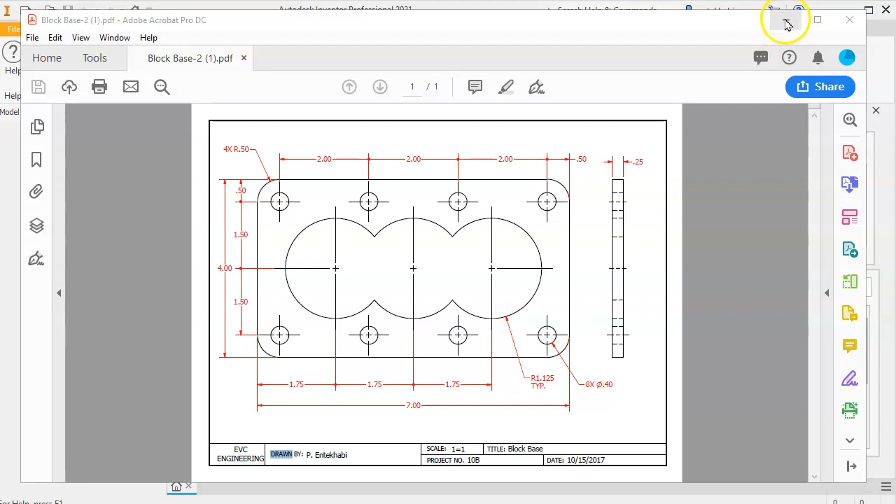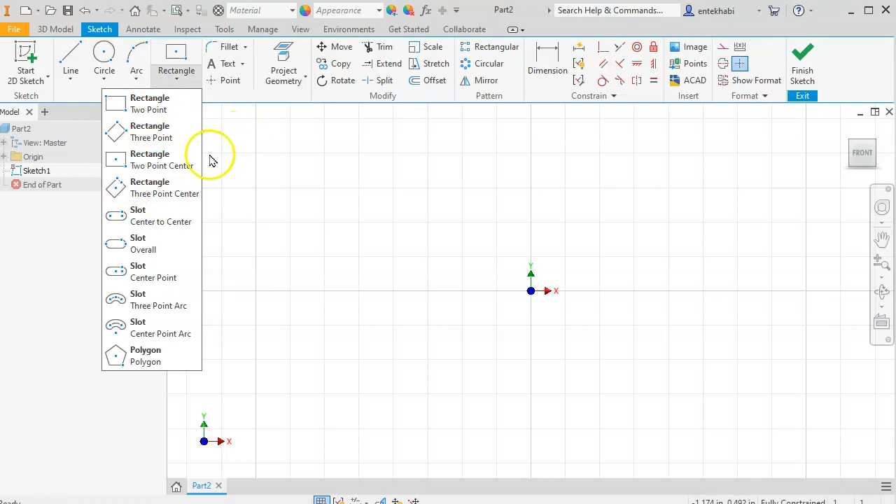Let's begin the model with accessing Inventor with a new file. We can start this new part with the default settings on English standard, and then start your sketch on XY plane. We can select this rectangle option. 2-point center would be feasible in this case. We can select the origin as a center and define a point on the upper right corner, and then add dimensions as indicated, 7 units, in this case 7 inches by 4.

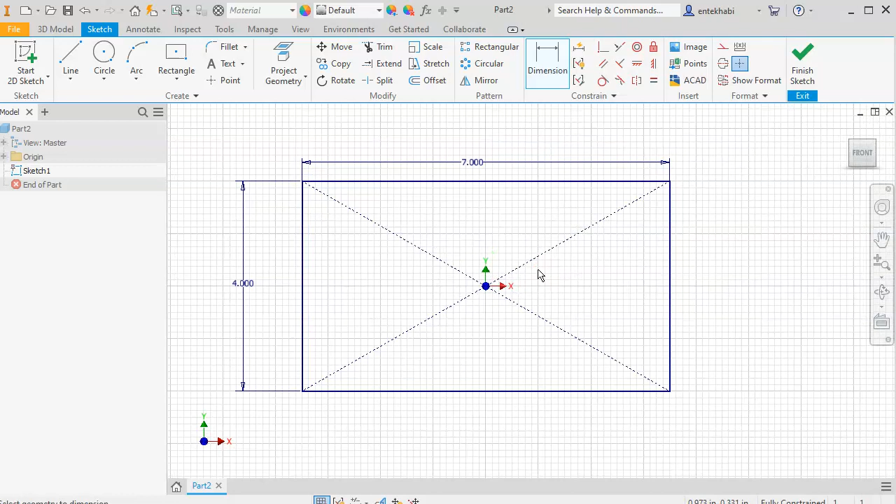At this point, you can add the fillets if you like, or you can add the fillets in the model. It's not too complicated to add the fillets here. We can do that by adding the fillets, setting 0.5 as radius, and selecting the corners, each line, to add the fillets to the corners. So arcs between two lines can easily be created with the fillets.

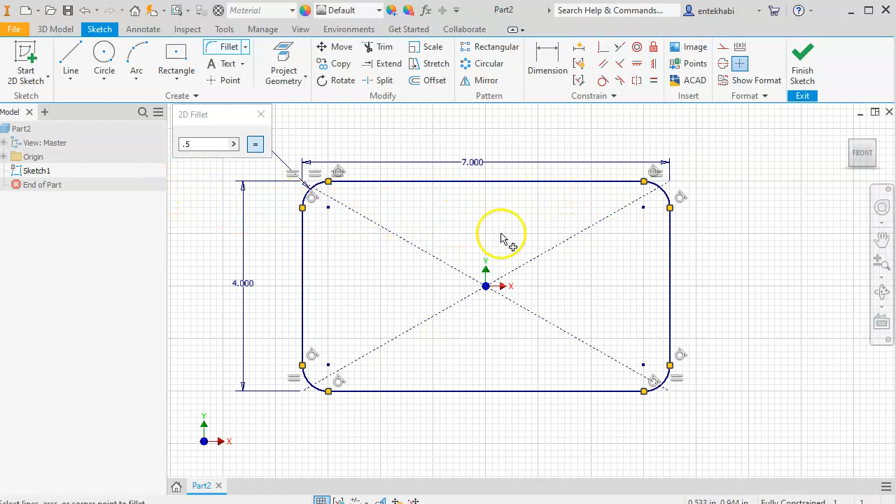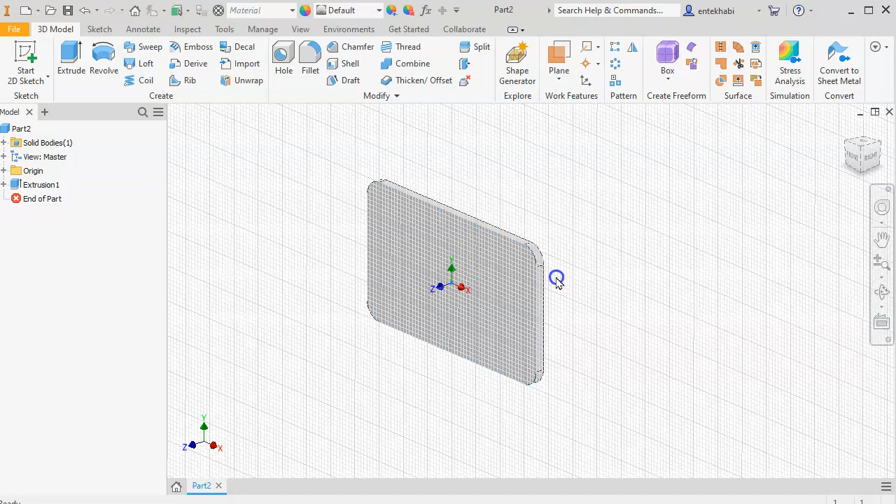Now we have that sketch. I'm going to just finish the sketch at this point and extrude 1/4 inch. 1/4 inch is the thickness in this case, the height of the extrude. Select the front face as a work plane and then start a new sketch. I'm going to do the middle part first by drawing 3 circles starting from the origin, selecting the next to the right, another circle, 1 to the left, 1 more. We have 3 circles in this fashion.

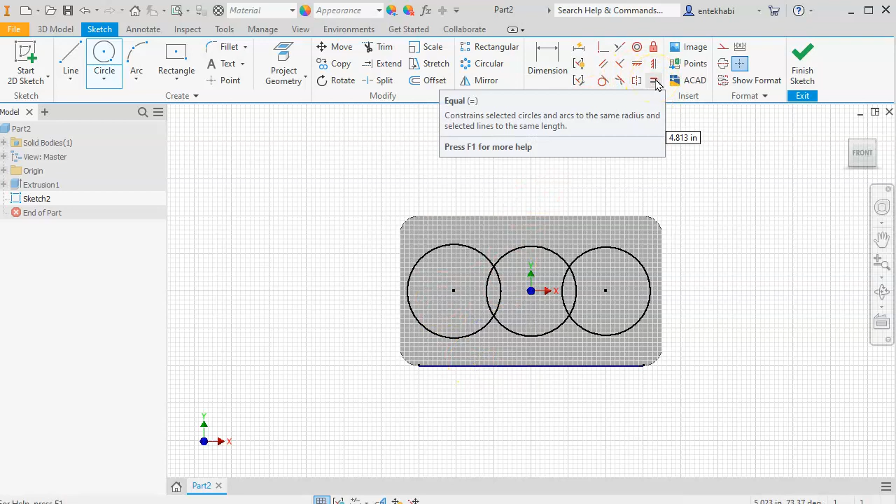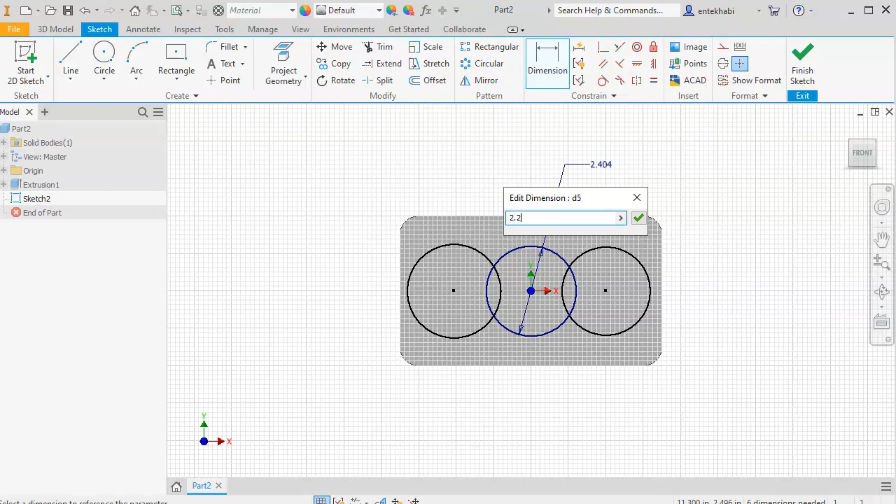We do have relations between each one. First, we add 1 dimension to the size of the circle. 1.125 is the radius of that arc, which in this case we have a circle, so we need to double that. That would be 2.25 as a diameter. We add equal relations between these 3 circles.

Next, we add the location dimension, selecting center to center, and that is given 1.75. And it's true also for the left side, 1.75. So up to this point, there is not much new. You have done all this type of work before, and we need to fully constrain this first. And at this point, I see that some dimensions are still needed. We need to have horizontal relations here between the origin and center of each circle. So now, as you see, they turn blue and they're fully constrained.

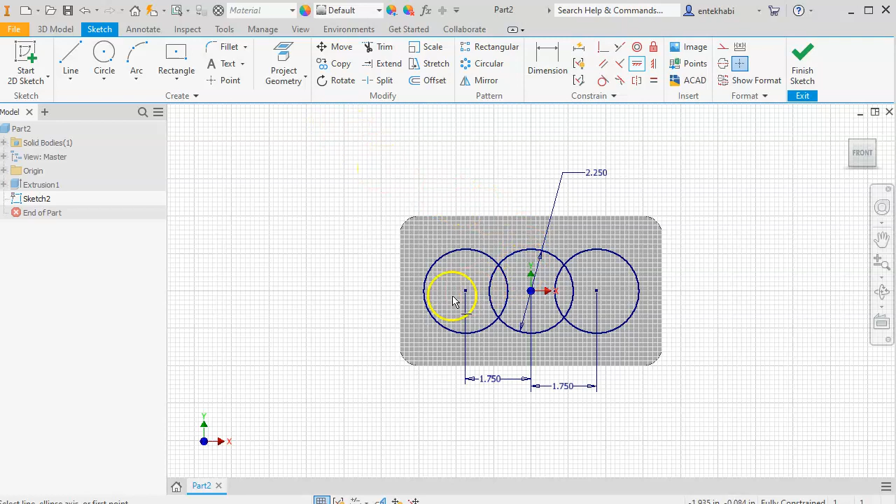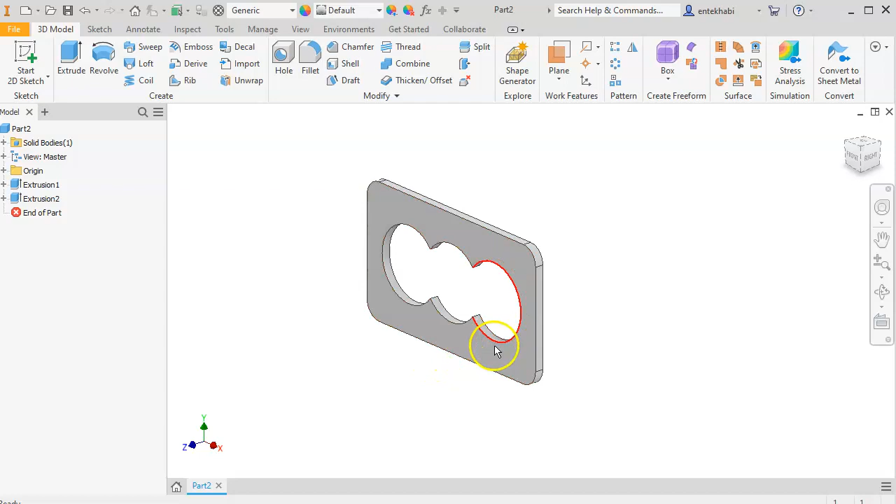Finish the sketch, and we can trim this one if you want to make your work a little bit easier, or you can just leave it the same way and then finish the sketch. But remember, you have to select each region individually to extrude. So extrude cut through all. So this is the part that you are going to create as a new feature, but using the circle tool first. I will use hole or circle. In this case, I'm going to use the circle.

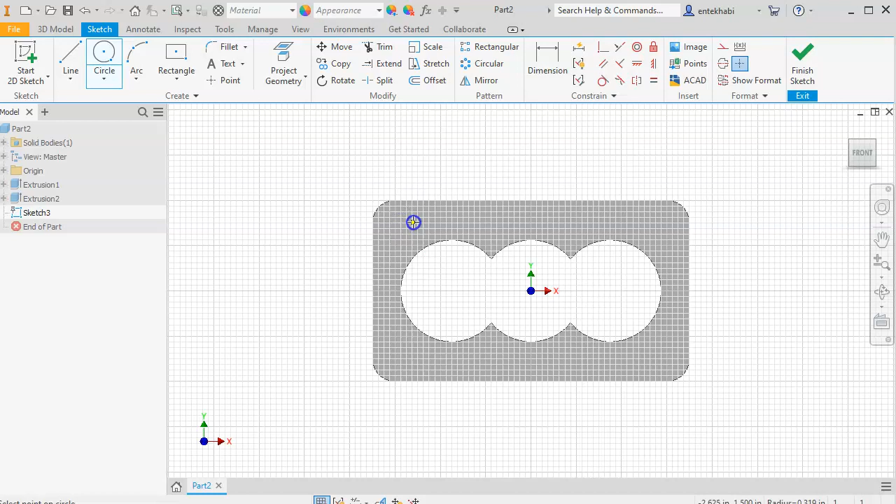On this face is a new sketch. Create a circle on this upper left corner, and add in the diameter of 0.4 as the size of that circle. Of course, I don't have a location yet.

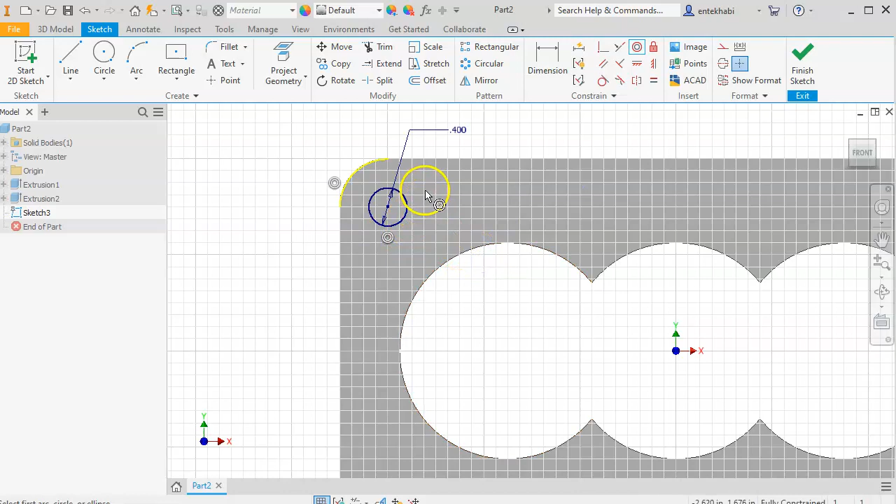In this case, we make those concentric. We have a relation that shows 0.5 in each direction, which, because this is also 0.5, would be the same center. You can either use horizontal and vertical dimensions, or simply select the concentric relation between the arc and circle to constrain it to that exact location, since 0.5 is the radius, so the distance would be 0.5 in both directions.

Once we have that, we extrude this circle to become a hole, and that would be cut through all.

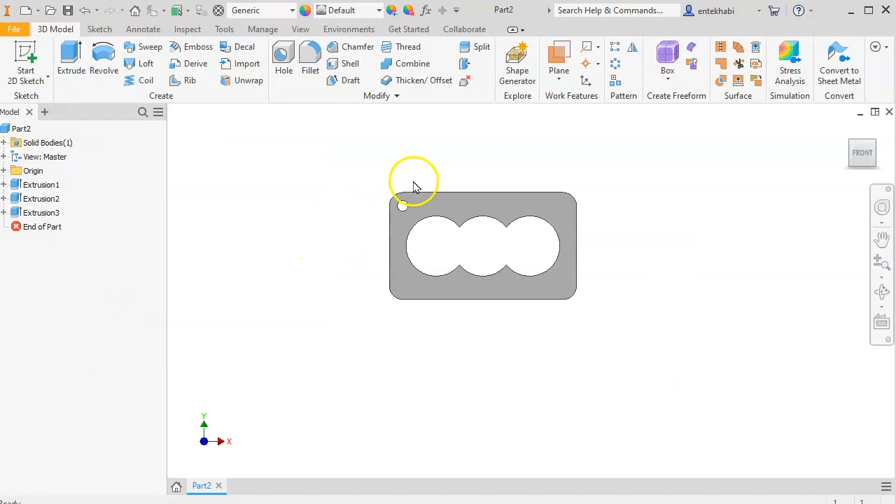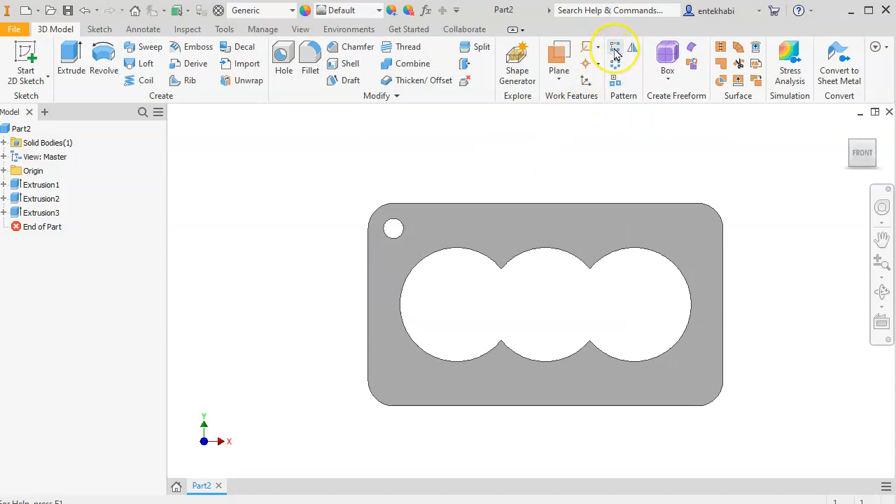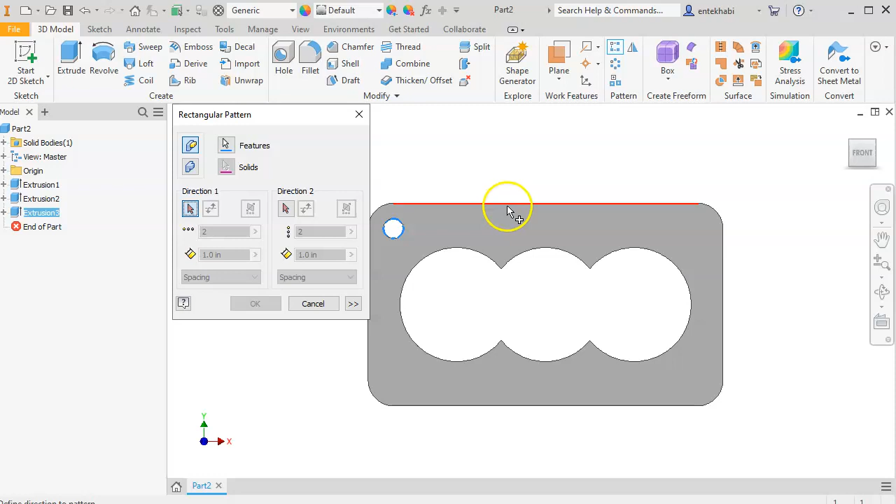Now we have two choices here: direction 1 and direction 2. The first choice is select object, where we need to select our extrude as our selection. After that, we give the directions. For direction 1, I'm going to make it horizontal by selecting this edge of the model, which defines the linear line, so to speak, to go in that direction.

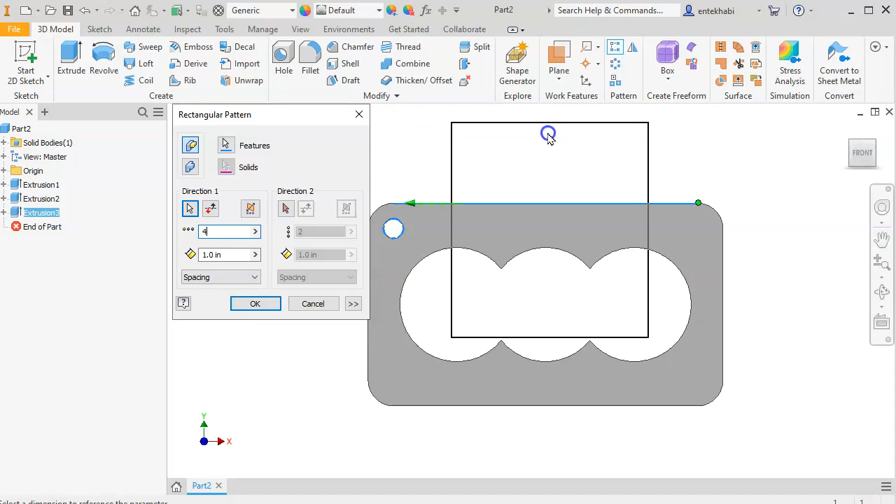Right now the arrow is pointing to the left, and I need to change it to the right by selecting the flip option here, changing the direction. Let's do the number here. We have 2, we need to change to 4. Let's see if we can see any preview here right now. As you see, the preview is going to the left side. I'm going to select this again one more time to see if I can change the direction. As you see now, the direction moved, the arrow shows on the right side, which is correct.

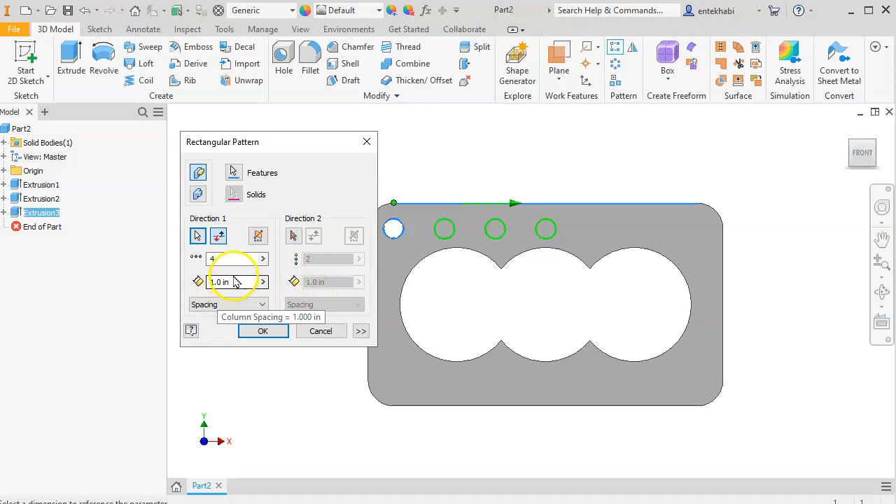Now the only thing I don't have yet is this distance. I have 4 items, 4 circles, and the distance tab, the window under number, shows 1. In our case it's going to be 2. And now we can apply this one. Or you could do another option here to go in the other direction, but it's much easier to finish the horizontal right now rather than go to direction 2.

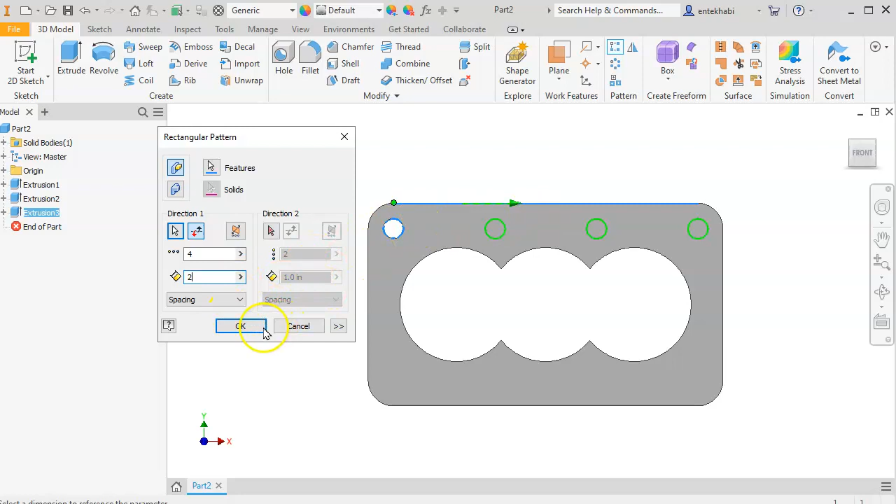I'm going to accept that and then come back and repeat this one more time. This time I'm going to select my last rectangle pattern as a selection, and I'm going to say I want this on the vertical direction. The only thing is you have to be careful when picking this direction: select the tab and then pick the edge.

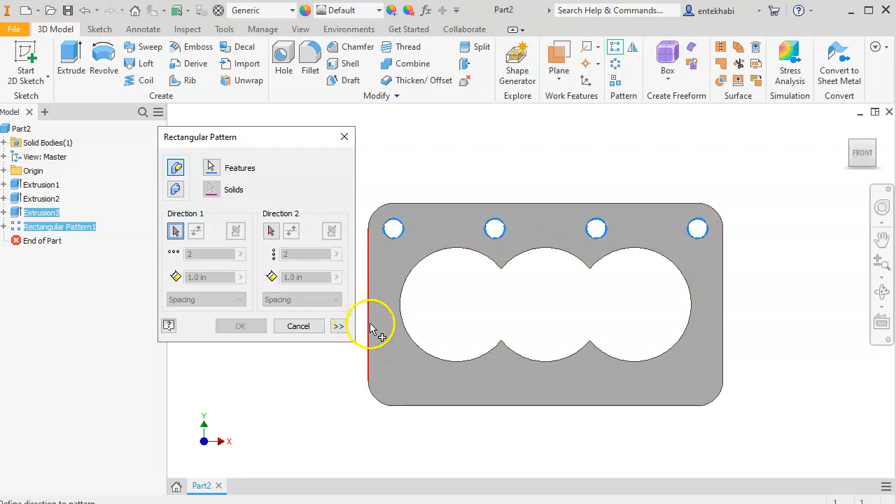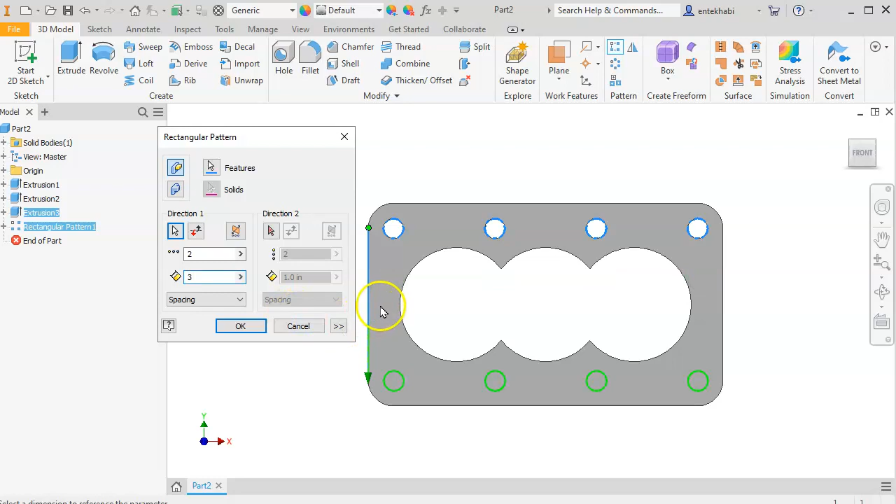Select the direction tab and select the edge, not the face. Select it, you see this red line appears, then left click, and that gives you an identical row based on this unit that I have here, 1, and number I have is 2, which is correct, but this spacing is not, so I need to change the spacing from 1 to 3, and then apply. So that is the new command that I would like you to apply for this one.

You can create the circle individually, but it would be extra work, and you're not taking advantage of the automated process which Inventor provides us.

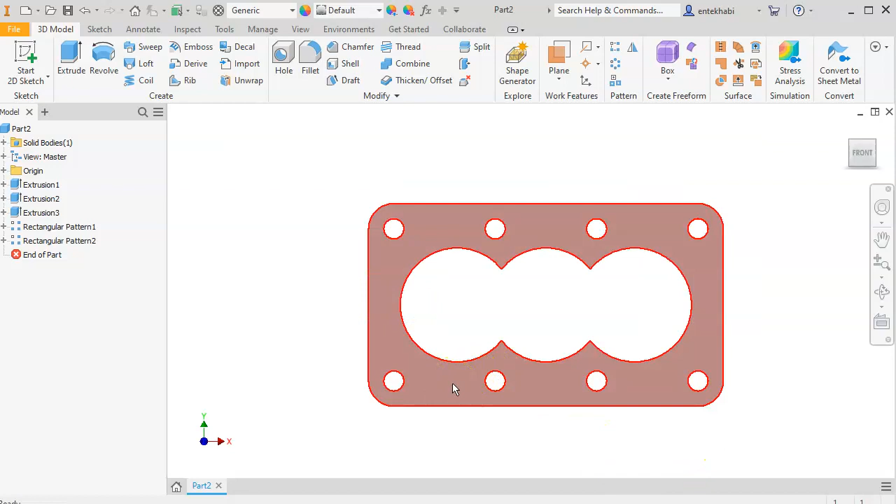So that is completed, and the rest of the information is given on the canvas. You need to add the material and other information accordingly to complete the assignment. I'm going to finish this one by saving, and you have this one called block base. You just save your drawing. I already have some saved, so make sure to save your work, and we will add dimensions in the next video.